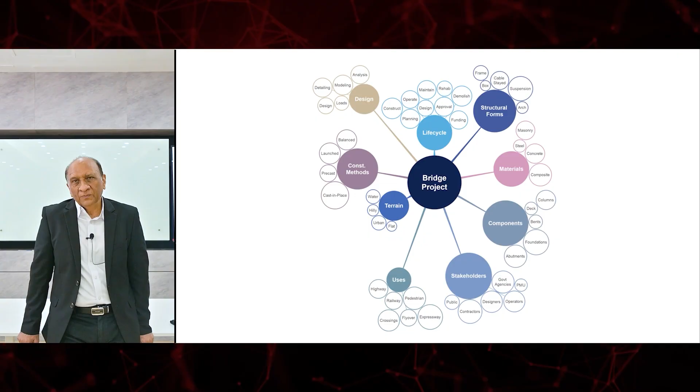If you expand each of those items, you will see further details, and we can keep expanding it to infinity, because everything has so much detail there. For example, in materials we have composite, concrete, steel, masonry bridges. In lifecycle we have so many steps. In components we have so many components. For bridge types we have pedestrian bridge, river bridge, and so on. Everything, if you expand it, goes really deep, and all of them are interconnected somehow. So understanding the whole bridge project goes way more than finite element analysis, or way more than just learning to use CSiBridge or just learning to use one tool.

This is a huge undertaking. As we get involved in this project of this endeavor, we will see that there's a lot more to do than just being engineers. We have to be designers and even artists, as I will discuss.

So that's the overall bridge project. Very quick view of how big this scope or the spectrum is. And emerging technologies are now coming to cover all of this. New technologies that we see are coming and affecting every aspect of this bridge.

Especially at CSI Bangkok, our role is to bring these emerging technologies into the bridge design process. So that's what we are doing, our research and development. Everything that we are doing is about bringing those in, and we are revisiting the programs to make sure that we incorporate these emerging technologies to make our work better, both in terms of how we work and the end product.

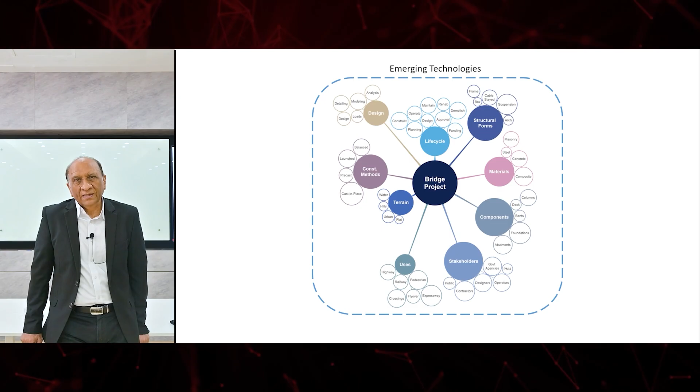So if you look at the bridge life cycle and the phases, it's a long one. It starts from feasibility studies, site investigation, and so on, all the way to rehabilitation and then decommissioning or deconstruction of the bridges. So it has so many steps on the way. We don't have time to go into every step, but we should recognize that we are dealing with a long process spread over 100 years or more of a bridge life.

So we have to be careful. Any decision that we make today will affect the bridge in 100 years or 75 years. Many times we think about very short-term decisions on cost and sizing, but it affects the bridge performance over a very long time.

And so that's why it's important that we understand where our position is. So we are doing the final design and detailed engineering. In this, we are learning about that. Of course, you are also involved in the construction, bidding, and many aspects, but typically consultants are only doing that part. But there are a lot of other things that we should also be focusing on.

And the CSiBridge Express and other programs that we are developing are going to expand this from only the detailed design to other aspects like cost estimating, budgeting, preliminary sizing, and I will talk about that a little bit. So we are trying to make sure that bridge engineers have more control or more role or more active participation in the bridge life cycle, not just the design part.

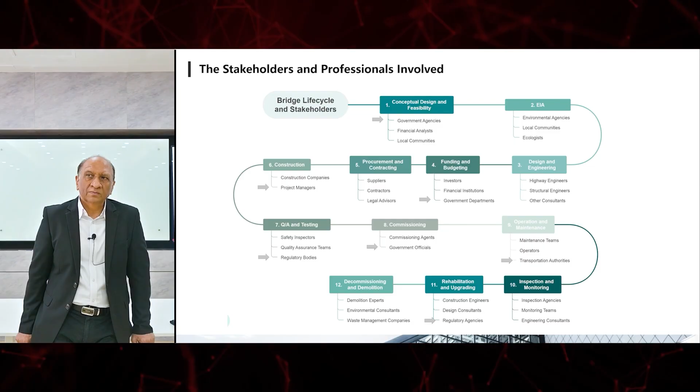So we have to work with the geotechnical consult, government agencies, and regulatory bodies, and project managers, and so on. So we have to deal with a lot of them while we are doing this project, during design and also during its rehabilitation. So bridge design, as I was saying, is a science, is an engineering process, and also an art.

Because now you will see, if you go to internet or to Pinterest, if you use that platform and say bridges, you will see all kind of, they only show beautiful bridges, because now somehow beauty and art is also part of the bridges. Bridges in Dubai, bridges in other places, they're just masterpieces in art, and in engineering and science at the same time. So we should start thinking beyond the design process.

Okay, coming back to Bangkok. So Bangkok, as I was saying, that is sort of get this inspiration to make this presentation.

If you look at Bangkok, people call it City of Angels, but for me, it's a city of bridges, because there are so many bridges in Bangkok that you don't see in many cities, and there's a reason behind that.

If you go to more developed countries, Singapore, Europe, or America, they prefer to make all their transport systems underground, because they are concerned about spoiling the city's landscape. So it's not permitted. Like in Paris, it is unthinkable that somebody can make a flyover or an overhead expressway. It's just not thinkable. Similarly, in other countries.

But in Bangkok, we see a lot of these structures above ground, because we have the soil problem, the tunneling problem, other issues, and also the cost. So a lot of our transportation system, mass transit as well as expressways, are almost all above ground. Another city which has it is Los Angeles. They also have most of the things above ground.

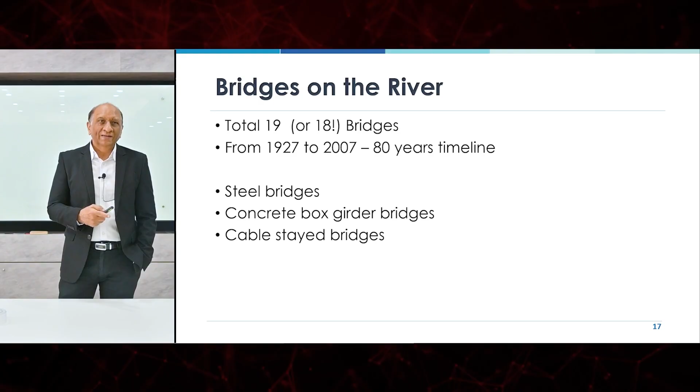So over 80 years, these bridges have been made, so we can see the development of bridge engineering if we just follow these bridges. We have steel bridges, concrete box bridges, and a lot of cable-stayed bridges. If you look at the bridges in terms of time, the first one was in 1927, the Rama 6 bridge.

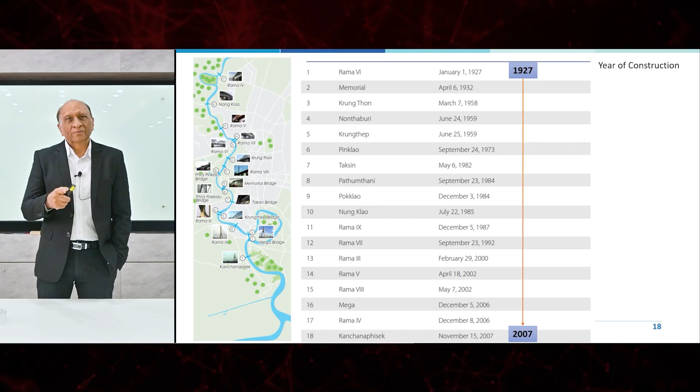The Rama 6 bridge was a steel truss bridge made for the train. It's no longer there, I understand—it has been replaced by a new expressway. I went there a few days ago and couldn't find it. Then we have other bridges, most of them steel in the beginning, then concrete, then cable-stayed, and so on. So you can see where they are located on this map.

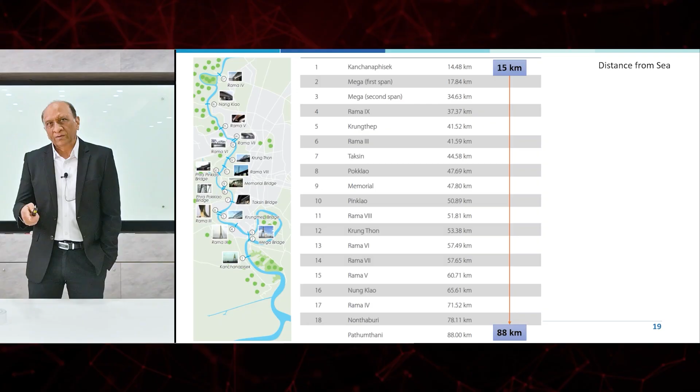Then we have the distance from the sea. So the first bridge is about 15 kilometers, all the way to 88 kilometers along the river, passing through Bangkok as well as its neighboring provinces like Pathum Thani and Nonthaburi and so on.

And then the span of the bridges varies—the main span from 485 meters, actually another one, not the new one, is longer than this, but up to 485 meters, which is quite large, down to 192 meters. So as the river goes northward it becomes narrower, and as it goes south it becomes wider. You can see the bridge width also changing to accommodate that river flow. So we have a very good range to study the suitable bridge span.

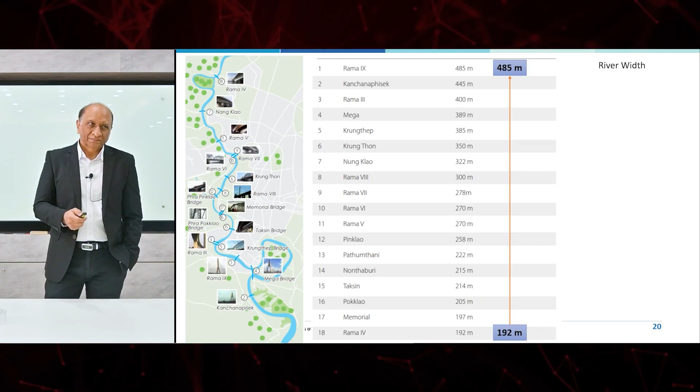Let's start with the steel bridges on the river first. This is the Krung Thep Bridge, a beautiful bridge. In the beginning, the problem was navigation, so they made several bridges which were openable, meaning the center span of the bridge could be lifted or opened for ships to pass. This is one of those bridges where the center span lifts up to open, so you can see over there.

The Memorial Bridge has the same thing. That portion in the middle, these two cantilever trusses, can be lifted to open the bridge for ships to pass. This was done at that time because high bridges were not practical, so they had these steel bridges. Most of these, two or three of them, had this opening or lift-up spans.

Then you have the Krung Thon Bridge, a very nice truss system. This one doesn't have a lift-up span, but it's a steel arch bridge, very nice. So you have different types of arch bridges here.

Then you have the Rama 6 Bridge, which was the first one, built for the train. It's a very simple, straightforward bridge, more on the north side. You can see here a very high truss with a large depth-to-span ratio because of the large loading from the train. That's the bridge that was built, probably the first one to be built.

Then we move on to the concrete box girder bridges. This is when they started to build the first box girder bridges. In fact, most of the bridges in Thailand have held kind of a record during their time when they started. One bridge at that time, Rama 3, was one of the longest cantilever box girder bridges at that time. Similarly, the Rama 9 Bridge was also one of the longest single-plane cable bridges at that time. So there are many kinds of world records, if not complete, temporary records when they started.

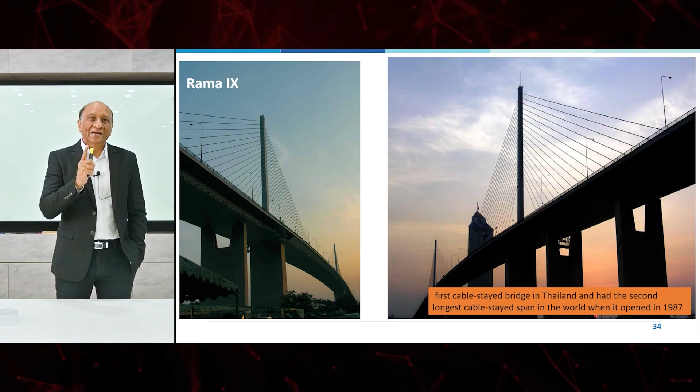So it's a huge challenge, and the pile cap for this one was so large. This is one of the interesting bridges, a single plane, one of the longest span single plane bridges at that time, because it doesn't have two planes, so it has a lot of torsion, as you can imagine, in the deck. It was made of a steel box with triangulation in the box.

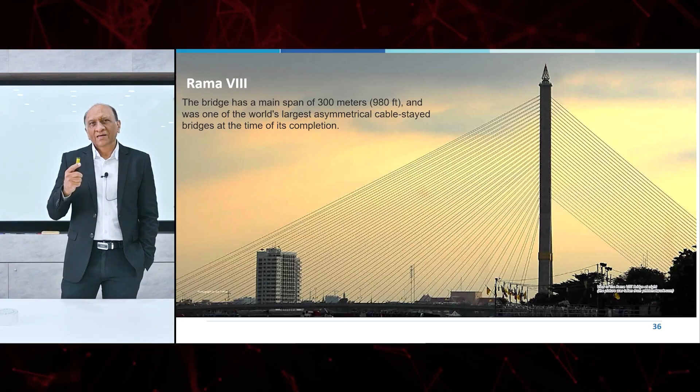This is the Rama 8 bridge, beautiful bridge. The beauty of this bridge is that it's in the city and very low, so you can actually walk on it, unlike other bridges. There are nice walkways and you can go and experience the bridge on top and on the bottom. It is single plane on one side and two cable planes on the other side. It's a beautiful bridge.

Most of the marathons in Bangkok always run through Rama 8. I've joined a few, and it's really nice — normally when I'm running on the bridge, I'm hardly running, I'm just focusing on the bridge itself to see how beautiful it is, because when you run from one side to the other, you see two cables changing into one plane. I think it's a beautiful bridge from every angle, because it's a single pylon bridge with two spans — a main span on one side and the other one is just an anchor.

Recently, just finished a couple of months ago, is the new bridge, which is just next to the Rama 9 bridge that was constructed earlier, because the traffic became so large that Rama 9 just couldn't handle it.

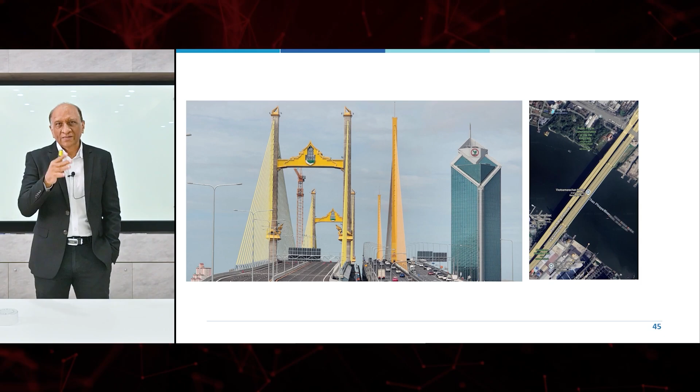The Rama 9 has had problems since its construction because of the large cantilevers around the central cable plane. There has always been some problem with the surfacing not attaching to the concrete, and the concrete not attaching to the steel box, and so on. So there's been always something going on with that bridge, and I think that's why they made the new one in different concrete, all concrete.

Okay, let's move on to the expressways. There are so many expressways in Bangkok. I arrived in Bangkok for the first time, I think, in 1986, and at that time there weren't any. So if you wanted to go from AIT to Bangkok, or anywhere, you just had to wait - sometimes it took 5 to 7 hours just to cross the city. But now we have so many expressways constructed during that time.

So this is the expressway map of Thailand, and these are the lists of the expressways with the operator - I took it from the BEM website - and then the distance of each one. There are about 275 kilometers of expressways in the city, as of 2003.

So that's quite a lot of bridges - they are all elevated bridges. You can see 270 kilometers of bridges, just bridges, all kinds of bridges, not counting the flyovers in the city. So that's a lot of bridges to be designed, constructed, maintained, and monitored.

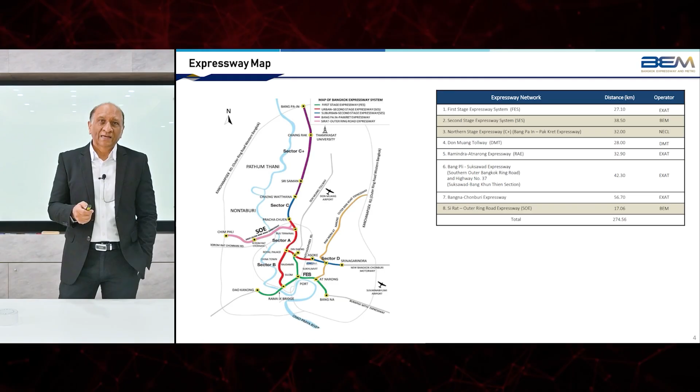The box girder is very big, a 6-lane box girder, but it's very empty, just a truss inside. The columns, the bents or piles, the piers are highly optimized, very, very efficient, because whatever saving they made multiplies 55,000 times. So they really optimized the design of this bridge in every way, down to the last rebar - the concept, design, system, and everything. It's really very impressive to have such a light bridge supporting 6 lanes of highway on top. Very, very interesting bridge in my opinion.

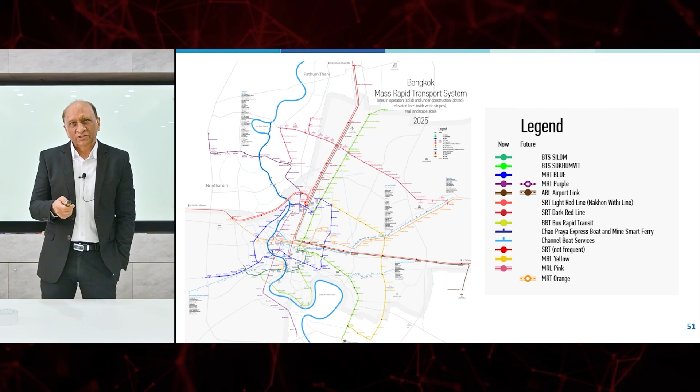They are constructed in all kinds of bridges, and there are so many stories during construction. This is the first SkyTrain project, finished around 1999. It's a segmental construction, each span has about 16 segments, and they were manufactured somewhere near AIT.

I remember we used to see 16 trucks carrying one segment each going to Bangkok every day, and every night they would assemble one span of the elevated highway. They only had 5 or 6 hours to do it because traffic could only be stopped at night, so within 4 or 5 hours they would construct one span, bring the segments, put them up, post-tension them, and finish before morning.

It was amazing because they built this in the middle of the busiest roads in Bangkok, like Sukhumvit. We watched this being constructed, and it was quite interesting to see it done while traffic kept running.

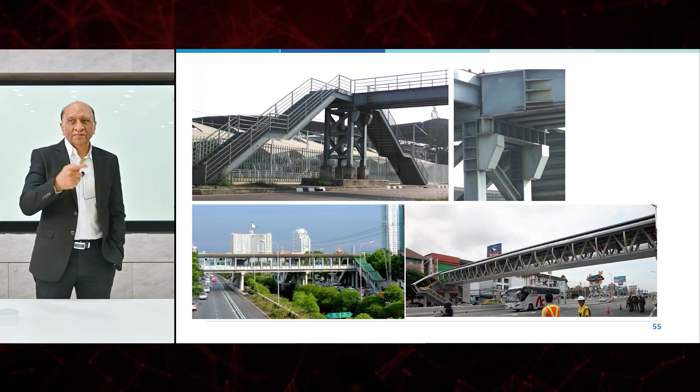This is an interesting one on Sathon. If you haven't seen it, please go there and walk underneath, it's a very beautiful bridge. A lot of people go and take the one at the bottom, the yellow one, along with some other pedestrian bridges. So you can see there's a lot of opportunity for creative expression in pedestrian bridges.

Now that we've gone through Bangkok's bridges as a summary, let's look at the challenges engineers have faced and the solutions they found, showing the complexity in designing these bridges in an urban environment and their construction. I think it's just unbelievable how this is done.

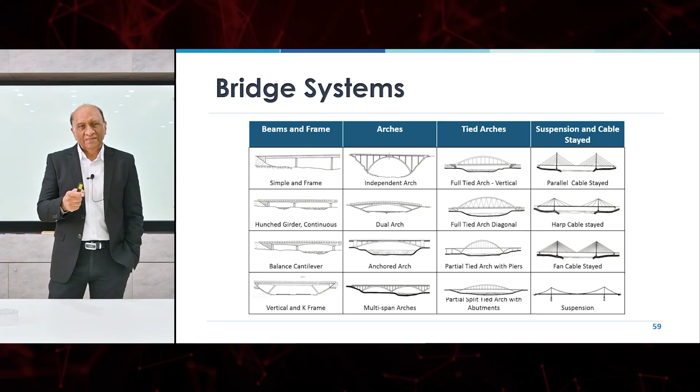Okay, the bridge system. I'm just going to scan through quickly. We have beam and frame type bridges, arch type bridges, tied arch type bridges, and then suspension and cable-stayed bridges. I don't need to go into a lot of detail here, I just want to give you some idea, and we'll look at them from the Bangkok bridges side.

The bridge also has a lot of components. We have a deck with slab, girders, diaphragms, and so on. We have substructure with transoms, approach, cables, piers, pylons, and so on. So there are a lot of components in the bridge that we have to model, analyze, design, and construct. And there are many ancillary components like barriers, drainage, lighting, and so on.

The biggest question in bridge engineering, and any structural system, is how do you choose which system is the best? Because you have so many options for the structural forms of the components. Which system should we choose? What should be the preliminary sizing? What will be more efficient? What will be more economical? Which will be built faster?

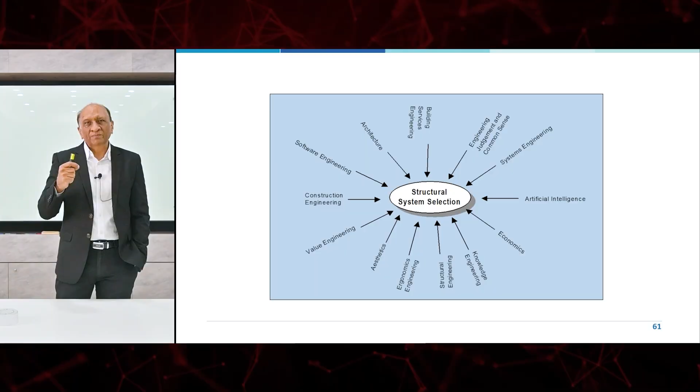Many of these bridges are build-operate-transfer projects. That means somebody puts the money in and then transfers it to the government, so they try to save every baht or satang they can from the design. It has to be really efficient, so system selection has to be done efficiently, and that depends on so many factors.

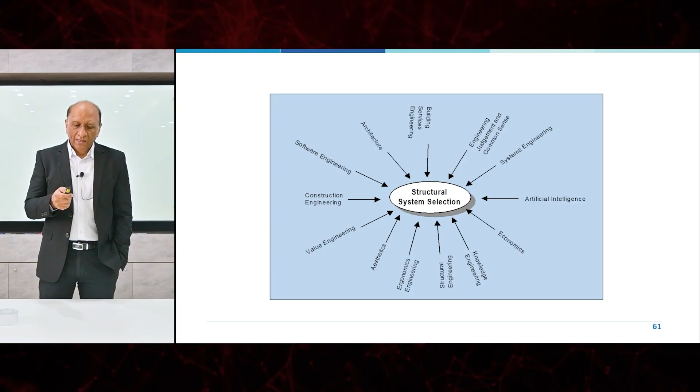But of course, as you know now, AI is here, and AI can definitely help us in this part. I will present towards the end one of the tools that our team and students at AIT have developed, which I think you have seen before, but I will show that anyway.

So we have explicit learning from experience, the first one, which is what we're doing now. By looking at bridges data or bridges we have already seen, we can learn from that and select the next system. That's learning from the experience of others. The second one is an AI system based on synthetic data. That means we can generate valid data that can be used, together with real data, to make decisions for the design or system selection for these bridges.

So let's go back a little bit and look at the bridges again in the Bangkok context, and we'll come back to this one more time.

If you look at the truss forms I showed you already, we have several truss forms. Most of them have a pass-through design, meaning two trusses on each side connected together at the top. It's a pass-through truss system, which is very efficient because it prevents the buckling of the trusses in compression. The top flange is connected continuously, so you don't have a buckling problem. Otherwise, if you put the trusses independently without connecting them, the truss can buckle in compression and won't be stable. That's why this system is very efficient and has been used in all of the bridges.

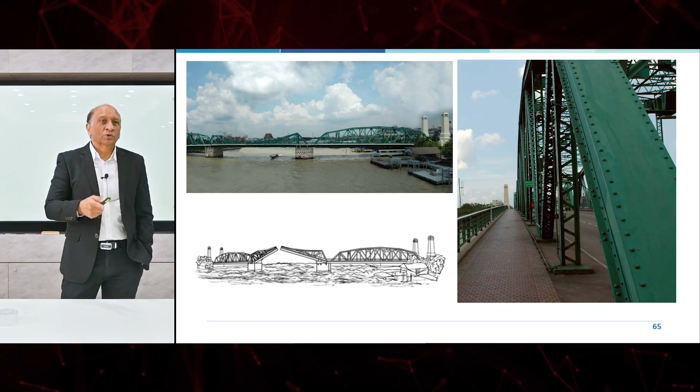That's a sketch I did just to show how that bridge would have opened during the opening, for when the traffic was passing over there. You can see that the cantilever truss has a different design than the main span behind it, and the two cantilevers meet together.

It's very interesting because the next bridge is also a balanced cantilever, concrete box girder. It's just that it doesn't open, but the concept is the same: two cantilevers coming from the sides and meeting in the middle, exactly the same concept as this one. So, like I said, the people who designed that bridge looked at the bridge and then looked at the design from that angle to make sure there is some relationship between them.

This is just the connections. You can see here how the members are connected to each other, and then you can see also the suspended span concept, that you have half the spans coming from this one, and then you have a suspended span in the middle, which was used for Rama 6 bridge.

Now let's look at some deck systems. These are the deck systems used in the bridges that you have seen so far. There are several box girders, and because these are all bridges on the river, they're long span, so you cannot use I-girder or something. There has to be a truss, or a box girder, or a cable stay.

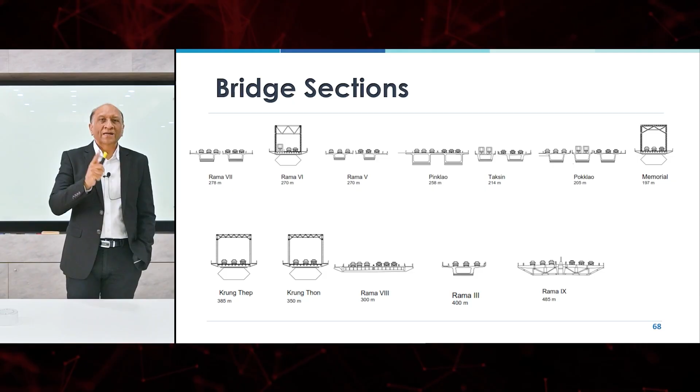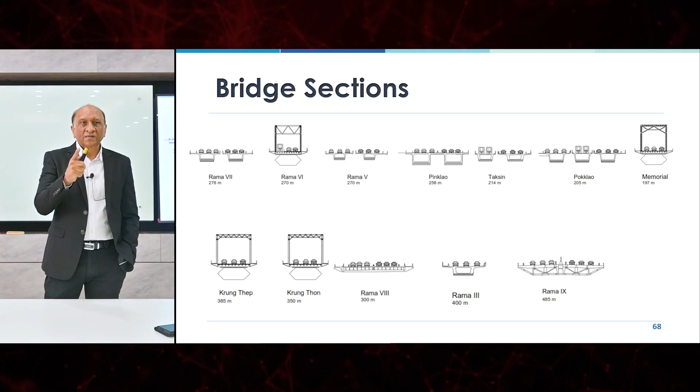At the cable stay bridge section, you can see there's a steel truss deck for Rama 9, and there's a steel beam for Rama 8 with the box underneath to cover it. For other bridges, there's the steel pass-through truss, so there's nothing below that. The deck is here, and the truss is above that. For concrete bridges, the structure is below the deck, but for steel, the structure is on the side or above the deck. That's the key difference you can see from here.

They really made it very, very fast because they just put the steel column. So the column is steel, the bracket is steel, the crossbeam, the transom is steel, girders are steel, and then just the diaphragm is steel, and the slab is concrete. There are many of them.

The problem that we are facing with these bridges, as you might know, is the vibration. Many of these bridges have a vibration problem which is being observed. There was a recent study by one of our colleagues from AIT. They did all of the instrumentation and found that the vibration in many of them, so they are being retrofitted at the moment. If you go on, especially on Rama 9 Road, you will see that the flyovers are being retrofitted to reduce the vibration.

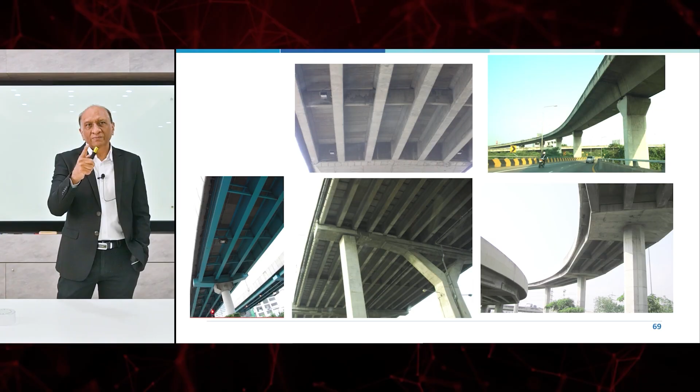Also, they require a lot of maintenance, repainting, and so on. Concrete, on the other hand, doesn't require a lot of maintenance except at the bearings. But you can see that the concrete, almost parallel, you have the diaphragms, and you have the concrete girder, and then you have the main transom. So you can see, on the right-hand side, on the top, the box girder, the same arrangement, and it's much more clean. A box girder is just 2 webs normally, or 3, and then you have a nice clean surface, and everything is inside - you don't see anything. Diaphragms are inside, if there are any.

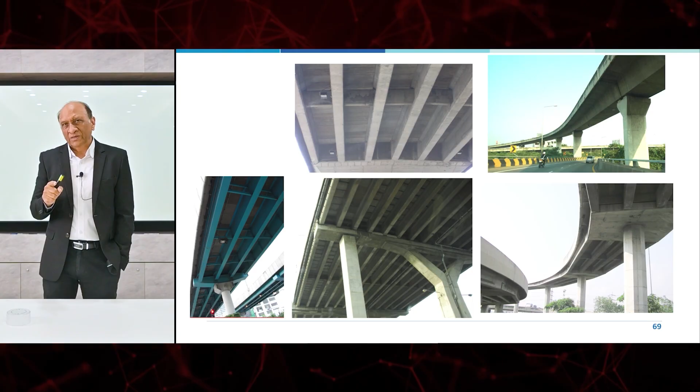And it's very good for curved bridges. But what I want to show you is the right-hand top and bottom picture. The top one is a curved bridge in box girder which just flows through quickly. For a similar curved bridge at the bottom using I-girders, you have to do, as you can see here, that you can't curve the beams. So beams are straight, meaning the slab has a variable cantilever from the sides on that one, and at some location, the slab may come inside the girder.

In fact, when we were developing the CSiBridge Express and we curve the bridge, we find there's this problem that the straight girder goes outside the deck and we have to adjust the deck width.

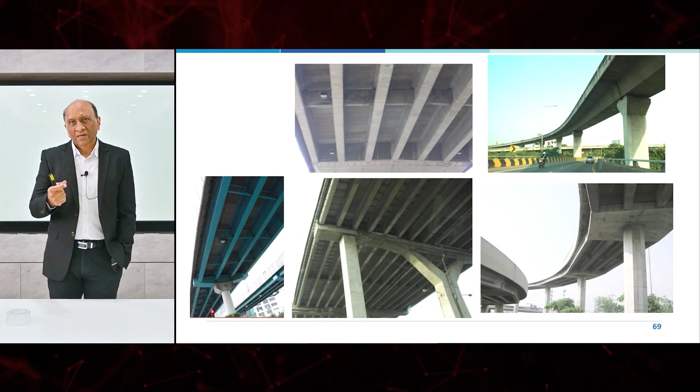Also, second thing you will notice is the capping head on the column. For the box girder, there's not a problem, but on the right hand, the one on the right hand bottom, they tried to keep the girder length the same, so they changed the size of the capping slab or the pier head, and made it unequal on both sides. So there's a very nice trick to keep the girders the same size and design rather than changing the length of each girder, which would be the second option. So this is some of the interesting things that we can observe from these bridges.

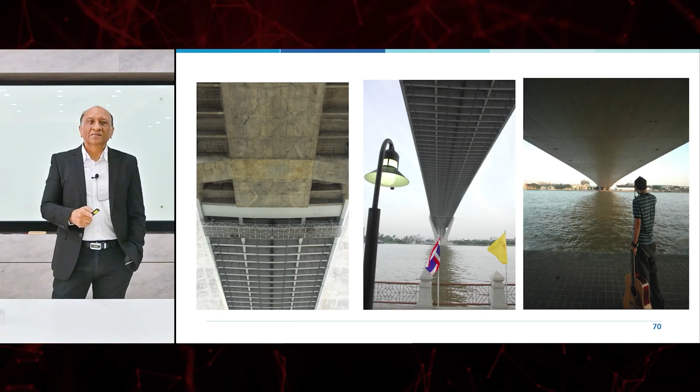This is an interesting thing for the cable-stayed bridge, where you can see the approach slab is in concrete, and after the main span starts, it becomes steel. That is understandable, because for the main span you want to reduce the weight as much as possible, since cables are so expensive, you don't want a heavy weight. So as soon as the main span starts, the expansion joints between the approach slab and the cable-stayed bridge are designed to handle very large axial expansion due to temperature. It could be as big as 300 millimeter or 200 millimeter. During summer and winter, day and night, the main bridge will expand and contract, and all of that expansion and contraction has to be accommodated close to this joint that you see over there.

On the right-hand side is the Rama 8 bridge, which is very smooth. They covered it up, and inside there are I-girders, but they covered it up with the smooth soffit, because it's in the city and it's very low, and you can actually stand there watching that. So that's the other bridge that you can see. Cable-stayed bridges have this interesting design for their decks.

Now let's look at the pylons, piers, and pier frames. This is where you will see things get really, really complicated in bridges. In my personal view, designing the deck is one thing, and designing the substructure is totally another challenge. Because the deck you can standardize to some extent, spans can be similar, and there's not much you can do. But for the substructure, every substructure may become unique, especially in the city, and then you will see here.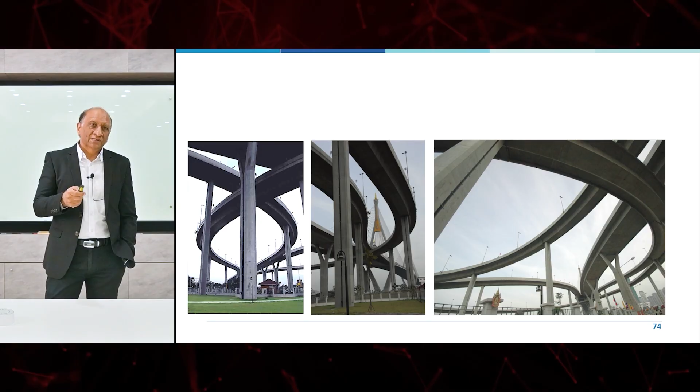So to avoid that, you need to make it as less stiff as possible, so it won't attract many moments. It will just act like a prop. The bridge stability is coming from its curvature, so you don't need the stability of the column to hold it. The bridge is stable as a form, but it's just propped up. So a few columns are designed heavy to take out all of the forces. It's a very complex arrangement of the substructure, with very careful designing of which column is the anchor column, which is the prop column, which column we should allow movement on, and which we should not. So modeling a bridge system like this is a huge challenge.

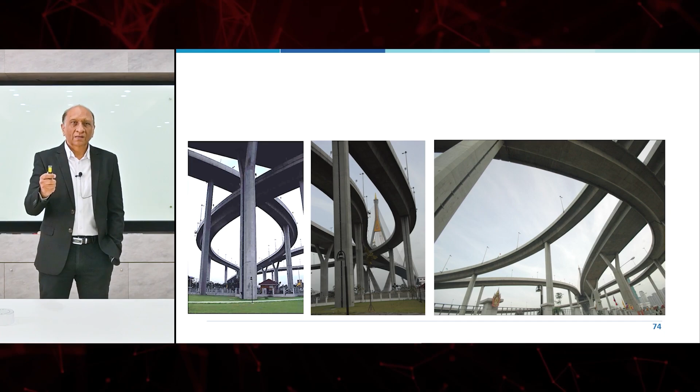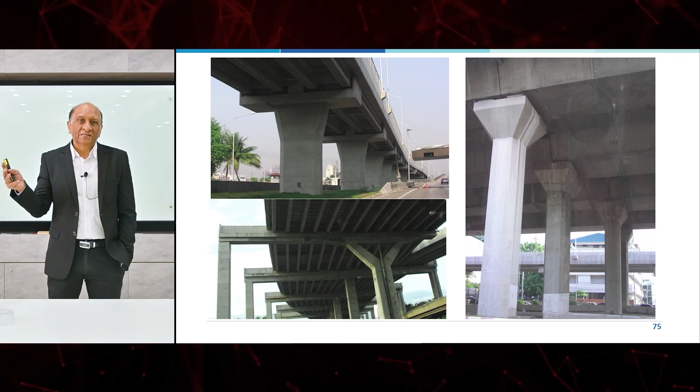So every column is different: you see a Y column here, the next one is not a Y column, before that is a single Y column. Every bend, every pier may have to be designed uniquely, and the substructure has to be modeled and analyzed. Mostly they are post-tensioned, so bridge engineers will spend most of their time designing the substructure for bridges of this kind. Box girder, on the other hand, is simpler. On the right-hand side you just have a single column supporting bearings at the top.

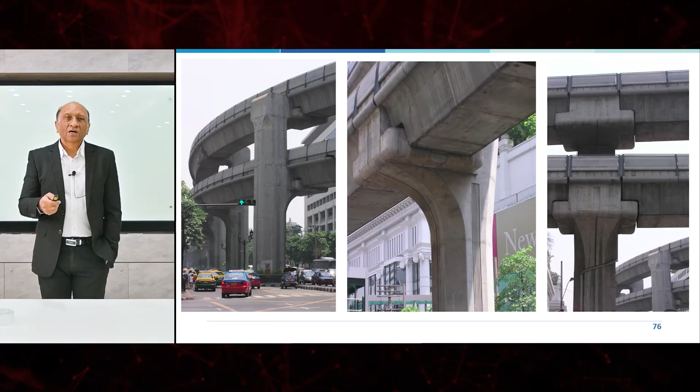You can see on the right-hand side how complex it can be. So the substructure of these systems — expressways as well as MRTs, the mass transit systems — can be very complicated and requires special attention to long-term creep effects for deflections, tilting of the cantilevers, and so on.

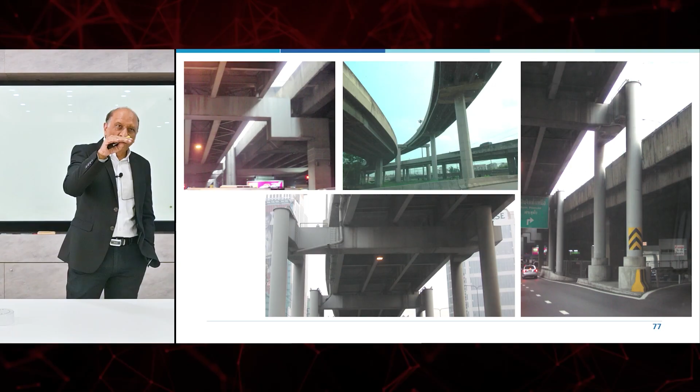Look at the left-hand side — you can see once again the steel stepped girder, stepped box girder. In the middle, you need to change the geometry of the girder because the elevations on the two sides are different. This is an off-ramp at Sukhumvit from the main expressway, and you can see what they have to do to make that work.

This pillar, the steel pillar, has to go under the existing bridge. On the other pictures on the right-hand side, they just don't have enough clearance, so they cut the bridge slightly to fit those steel columns in. The steel columns must have been optimized as much as possible so they don't have to cut the bridge too much and can still fit in the tight spot.

These are the challenges that bridge engineers face in handling bridges in a city. The same is the case with the central one — you can see a curved bridge with tall columns and their pier heads.

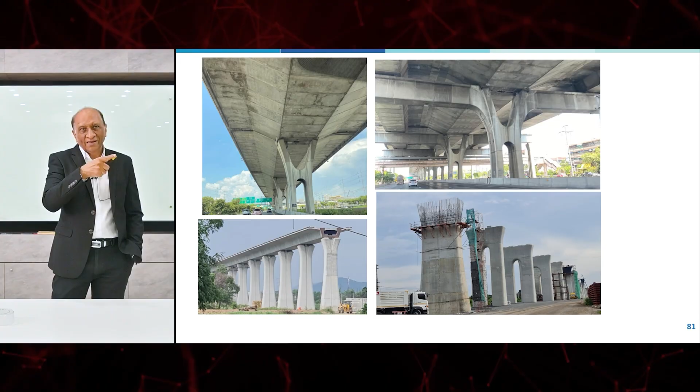The one I showed you, the long expressway, beautiful design of a 6-lane on a single cell box with triangles inside and struts inside, very efficient. And the one on the bottom is a very new bridge you might or might not have seen, for the high-speed train between Bangkok and the North. So those are the columns for that, the bottom two pictures.

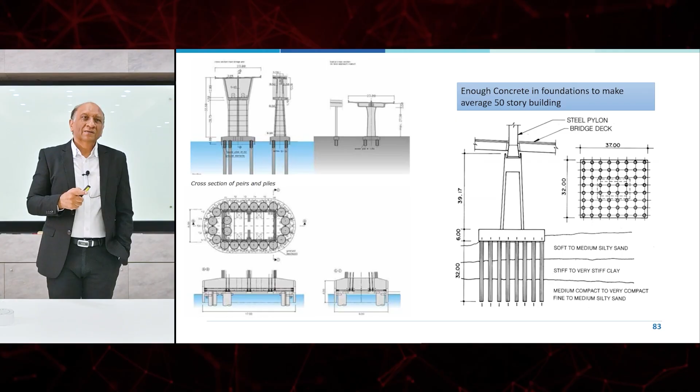I remember when they were constructing, they had to stop the whole supply of concrete to the city. All supply had to go to this foundation. So you can see here, huge foundations there.

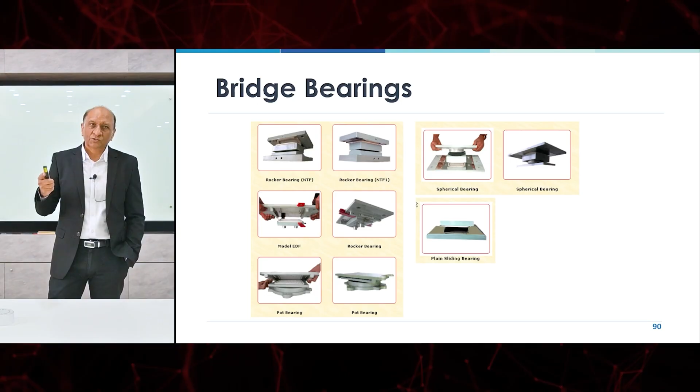And then we have bearings and joints. One of the key challenges in bridges compared to buildings is that in buildings, everything is made to connect together, nothing is supposed to move away. But in bridges, they are designed to move while transferring the load. That challenge of allowing things to move while transferring loads becomes a challenge in bearings of bridges and expansion joints, because you have to transfer the force but allow movement also. That makes a challenge in construction, but most importantly in modeling, where you have to model these bearings as linear or non-linear. Sometimes these are real hinges in old buildings, old bridges, steel, a true hinge.

You can see on the left-hand side the sliding, and then you have these bearings, all kinds of bearings, complicated bearings coming up, some high, some low. You can clearly see some pot bearings, and how the expansion joint has to be provided for their movement, and how they allow movement in one direction but not in another, and so on. So you can see all these interesting bearings in the bridges.

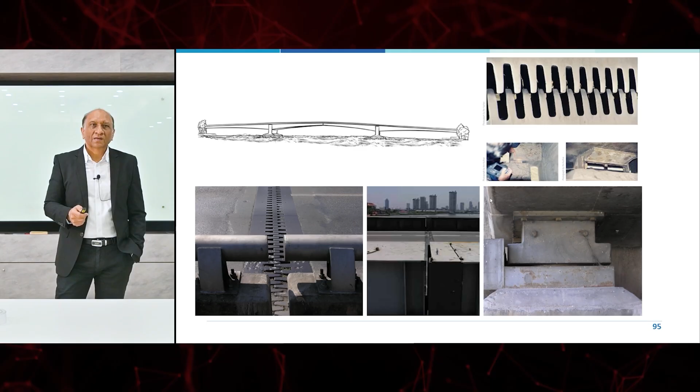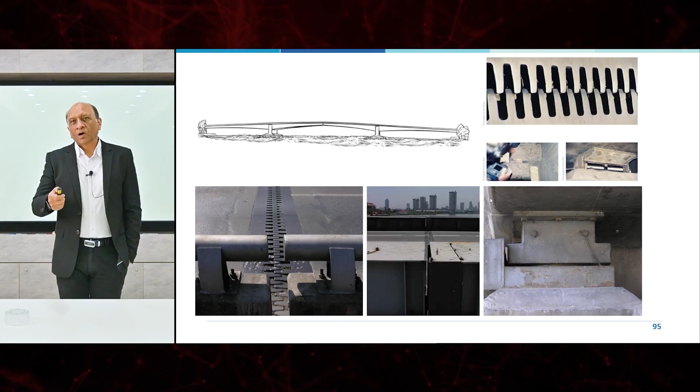Like I said, that's the expansion joint in the center of that bridge, Pinklao Bridge, and then that moves. Sometimes it gets locked, that comb you see in the middle is the expansion joint, moving, closing, sometimes completely closed, sometimes completely open, depending on the day of the year and time of day. And that's the lock I was telling you, there's a misalignment on the bearing, you can see that on the bottom right.

Let's talk about the aesthetics in bridges a little bit. This Rama 3 is a beautiful bridge, so the aesthetics have been considered very nicely in the design of everything in that bridge, I think that shows there. So we must make sure that when we design bridges, to form the flow, the aesthetics should be considered in all aspects.

So there are some rules, as you can see in this presentation later, how to proportion this. What we have seen so far is what we should do and also what we should not do, by looking at existing bridges, because you can observe the good things and also observe not so good things. So we can learn from this experience.

Okay, future design trend. Now, because of the tools coming in, we can integrate the whole process.

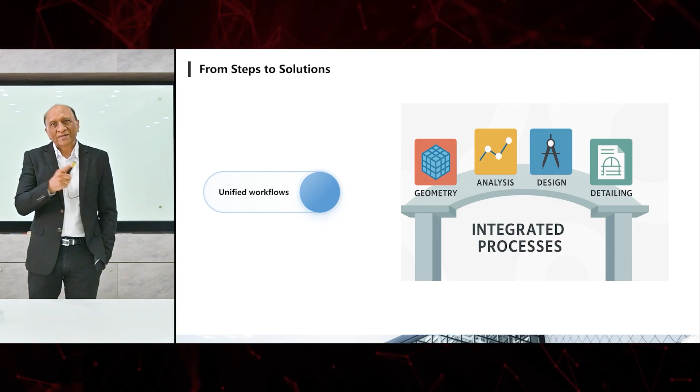Before, it was step by step: one step, transfer data, another step, transfer data, and so on. Now we have the opportunity to integrate. SAP90 was made 50 years ago when people started designing bridges using SAP90. At that time, it was a program that purely worked on text data files, no UI.

From there, we have SAP2000, which advanced a lot. And then from there, we have CSiBridge, which is a special version of SAP dealing with bridges. And now we have the new CSiBridge Express, gradually in that transition. So CSI is developing these tools more and more focused toward bridges, more integrated with every step.

CSiBridge main can handle any bridge of any type, of any complexity that you saw before. So there's nothing CSiBridge cannot do if we model properly.

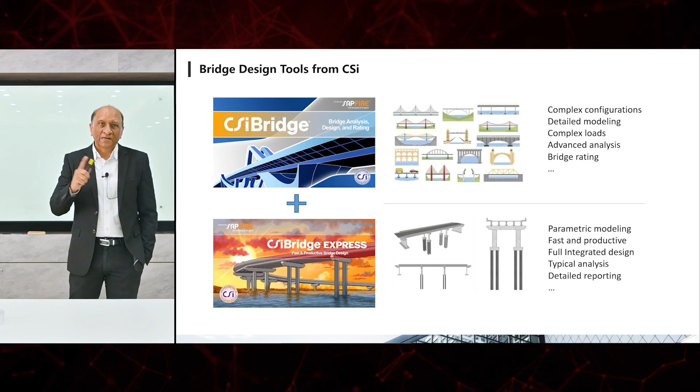CSiBridge Express, on the other hand, currently is focused on parametric design of girder bridges, plus box girder bridges in the coming version. So let's just take a quick look.

In the parametric design, you can start from the map, make the design, automatically make the mesh, automatically do the analysis, automatically do the design, automatically do all the rebar cage, automatically transfer to Revit, do the costing, BOQ, and finally put the bridge back on the map.

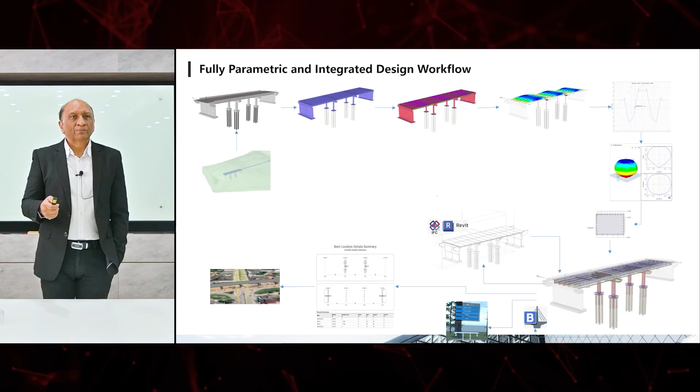And then you can have the BOQs and the costing done. The costing and BOQ are an integral part of the bridge because that is needed right from the beginning. So we can do that.

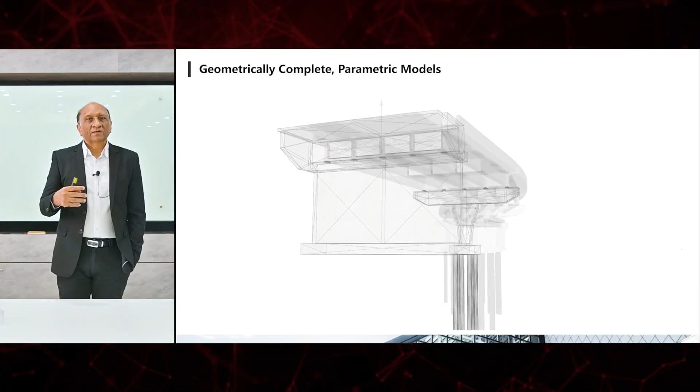Okay, let's take a quick look at the three-minute video showing how the parametric modeling can help us create the bridge completely, geometrically complete, step by step.

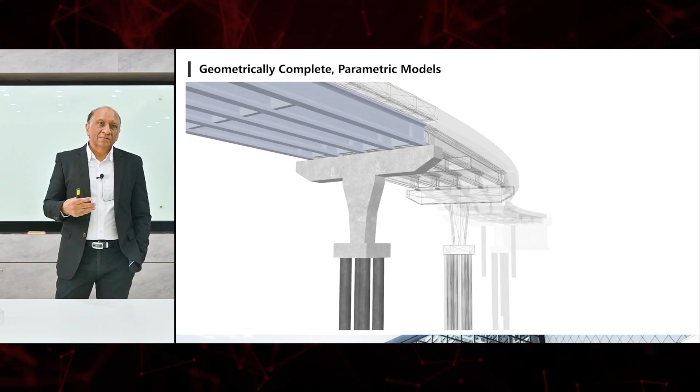You can see that the abutment is being modeled, and then you have the pylons and foundations and the girders and the barriers and the diaphragms. You keep on seeing how the bridge is built up from pure geometrical elements which are almost as accurate as the construction.

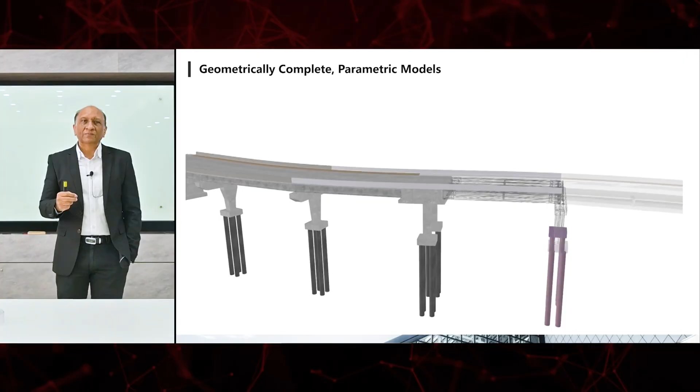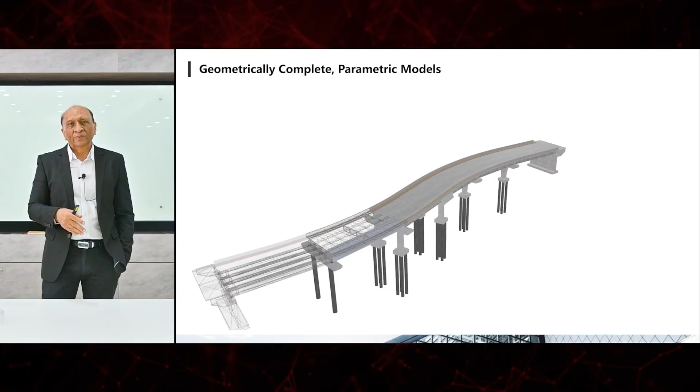It's important that if other people are going to use these tools, we make the bridge complete - not just a finite element model, but a physical bridge model should be as complete as possible so people can use it for drainage design, lighting design, management, or anything.

So the first task is to make sure that the bridge model is as complete as practically possible, ready for construction level of detail. That's the first thing. We start from that end to make sure the bridge will have sufficient detail.

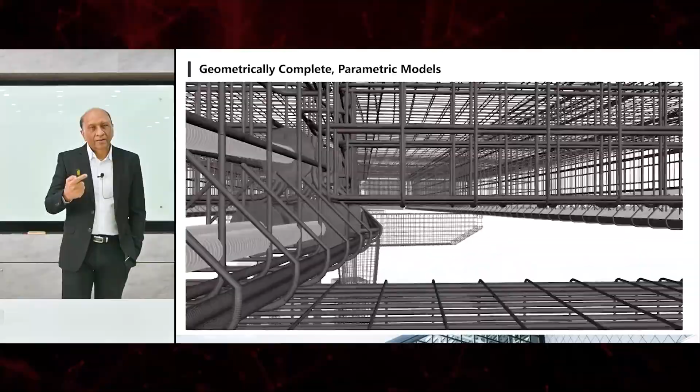You can see that now the reinforcement should be part of the bridge model, not designed later. You can update it, but we can put the reinforcement in the bridge at the time of modeling. So we already have the costing, we already have the BOQs ready. We also know how the bridge reinforcement cage will look like.

And we can modify that without even going through the design to see what we need. So you can see the bridge, the reinforcement is all there in the model itself before we do any analysis or design. This is the model of the bridge before we've done the finite element modeling, analysis, or design. So you can see it's more or less complete in every way.

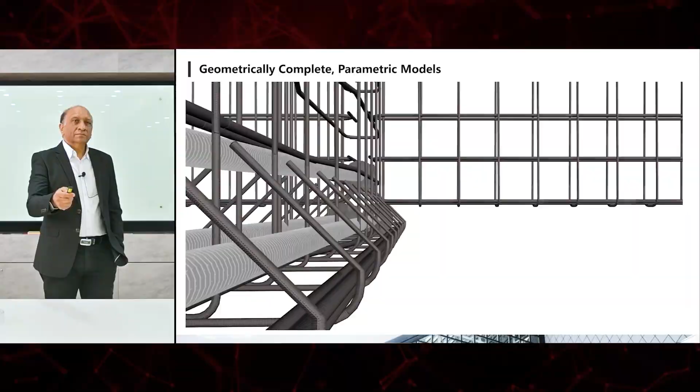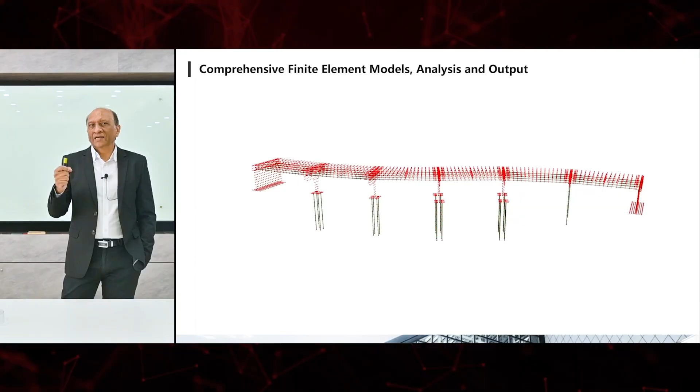And this is the modeling, second part now: how do we convert that into a finite element model which will be as good or even better than we can do manually? Normally people model these bridges using frame elements.

But in CSiBridge Express, we use the shell model and solid model to model everything, because that's more precise and matches more with the physical structure.

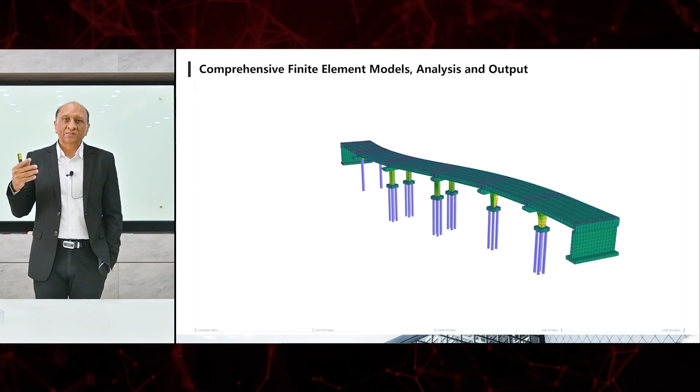So the physicality of the bridge is maintained by creating a finite element mesh which is very close to reality, including the abutments, all the components of the bridge, piles and so on, and soil and springs and everything.

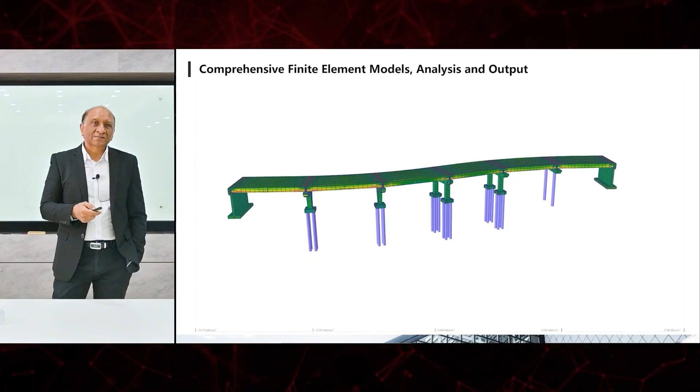And then you can analyze it. From that shell analysis, you can extract the forces, bending moment, shear forces for the design purpose by using integration. And then you can get the forces in the substructure.

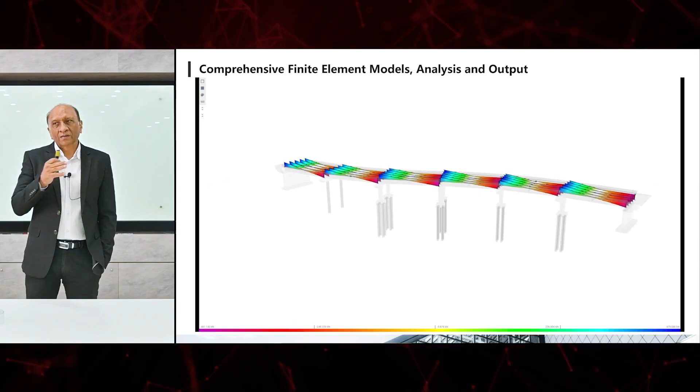And then you can use that information to design the foundation, design the columns, design the capping beams, and so on. So that's how the integration of the complete geometry to meshing to analysis will work.

So you can see here that all the things that I showed you earlier, then you can get the design forces from there, and the program should be able to design those substructure as well as not only the superstructure, but substructure components as well, all the way to piles.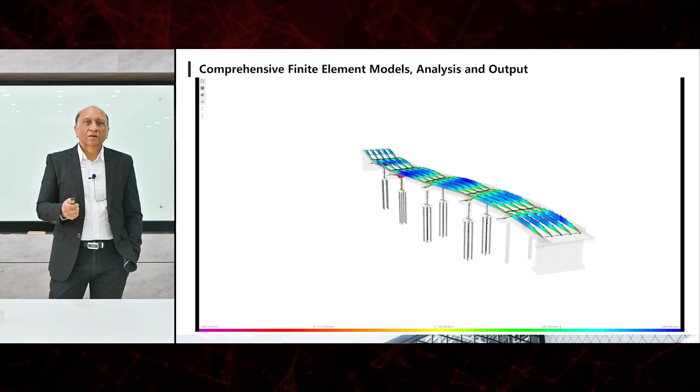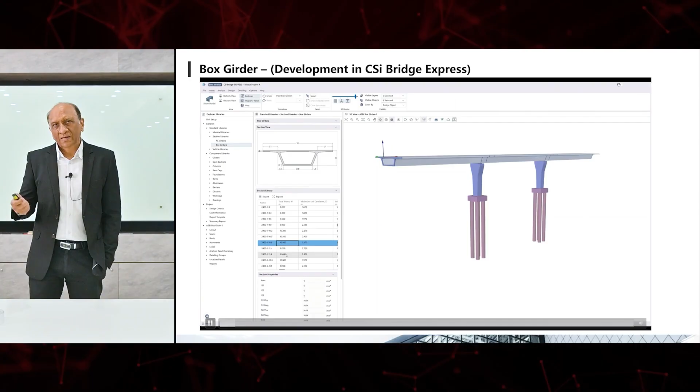Okay, so this is the last slide, the box girder coming up, not complete yet, but this is the next version of the CSi Bridge Express, which we hope to finish very soon. So currently, basically, handling the box girder in the same way. Box girder modeling is normally more complicated because of the shape of the box girder.

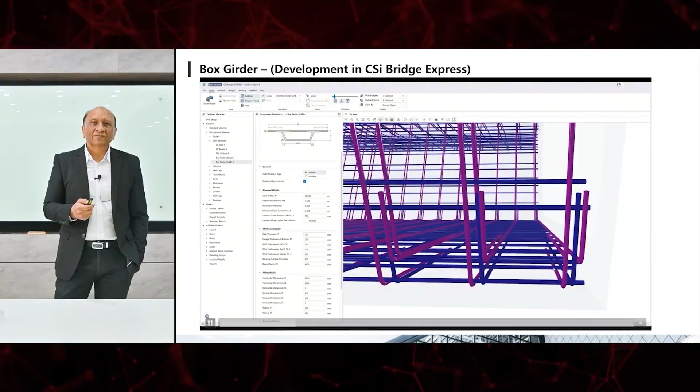So we can create automatic mesh, also put the reinforcement in the box. And this is the same box used for many of the bridges in Bangkok. So you can put the reinforcement, it's already there. And then from there, once you have defined the segments of the box and set the geometry of the box, then it can be put onto the bridge itself. So that's the bridge. And then you put the box there. Now it's a box girder bridge.

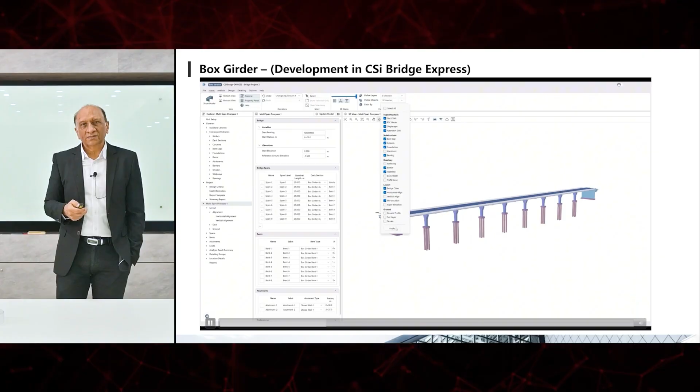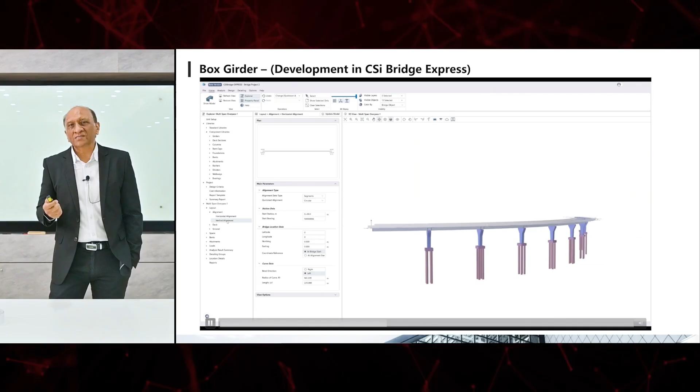And you can see inside the box if you walk through or crawl through the box. And then the good thing about parametric design is that you can create a straight bridge and then just put it on a curved alignment. And you say, okay, I want a curved bridge, and the bridge will become curved, and all the things will just become curved without doing any change, just one step, and the straight bridge will form the curve and also the elevation. So it's a curved bridge with super elevation, or then you can just make it in few minutes by designing it for the straight and then just putting it any alignment. And because of the parametric modeling, it just gets everything.

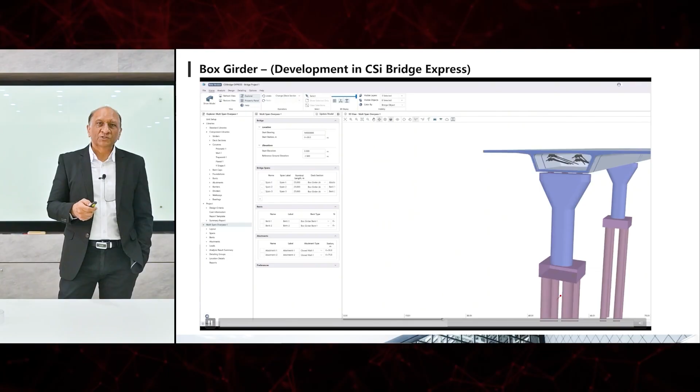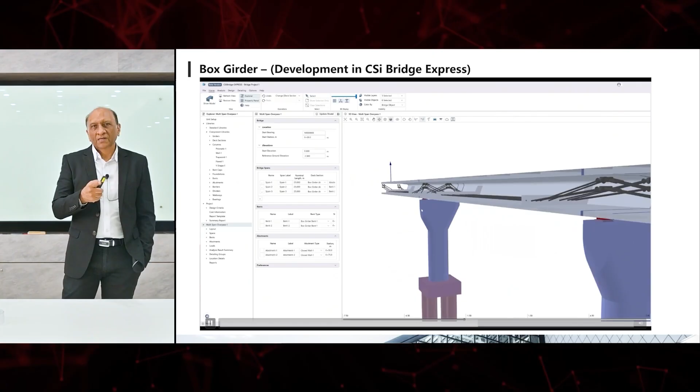And you have the tendons inside, the post-tensioning, you can see, and this is the external tendons for this bridge. And then you can see them, how they will be anchored, so all these components are real. And then the model will take these real components and then create the finite element mesh and do the analysis. And then, of course, like I said, the rebar cage is already complete because we defined it from this superstructure all the way to the piles. So everything is in the model, and it just has to be confirmed by analysis and design. So that's the way that the parametric designs will work.

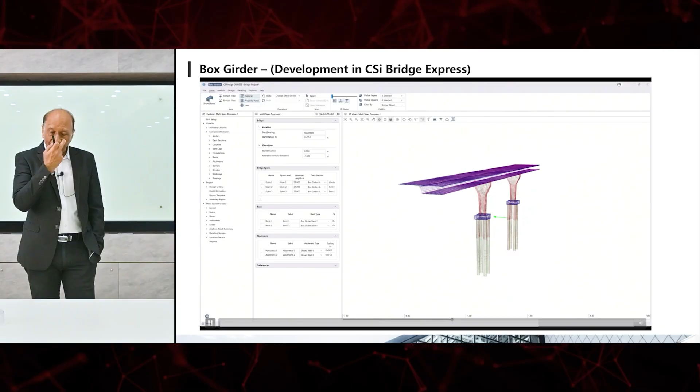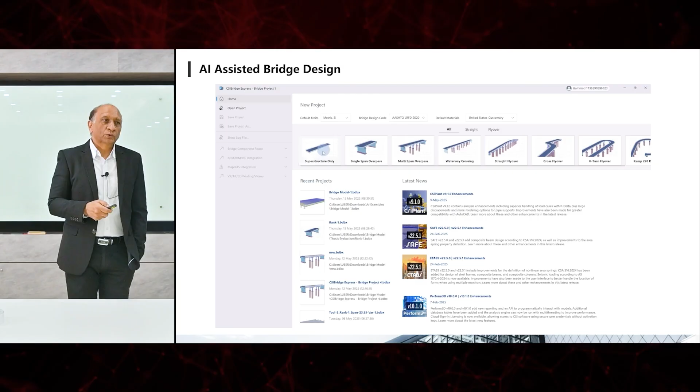The last item is the AI-assisted design. This is the way that AI can be used to carry out the preliminary design of the bridge, because a student here in AIT, who just finished last year, used CSi Bridge Express to design 7,000 bridges of every different configuration, then used the data from those 7,000 bridges to create an AI-enabled tool.

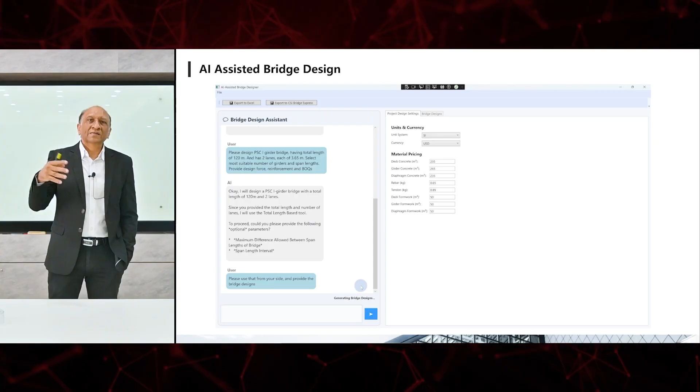So you can have a conversation and say, I want to design a bridge that much long. What is the most economical, optimum size of the girder, spacing, number, span, how many spans should I use, what kind of girder should I use? You can have that conversation with this AI tool, like a ChatGPT kind of thing, and it will give you many options that are possible.

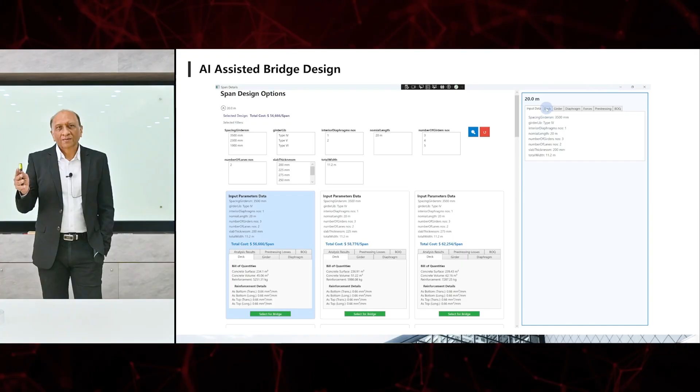Then you choose one of the options, and this option will be transferred to CSi Bridge Express for further analysis. So you don't have to start the model, you just use AI to do the preliminary sizing, you can modify here, and then it goes directly and creates a model in CSi Bridge Express ready to run. So theoretically speaking, a bridge could be done in 10-15 minutes for the preliminary design. Of course, for detailed design, there's so much more to be done, but at least we can have the AI tools assisting us in that direction.

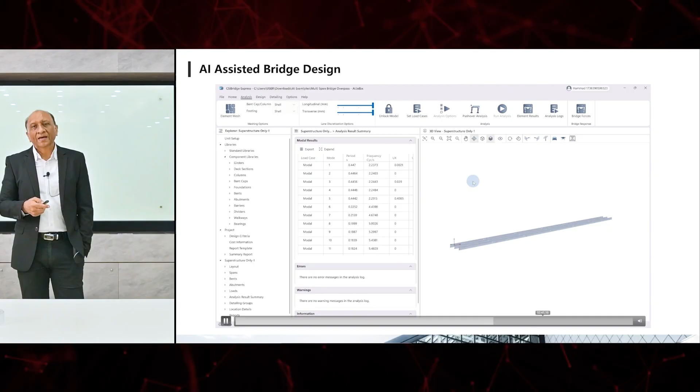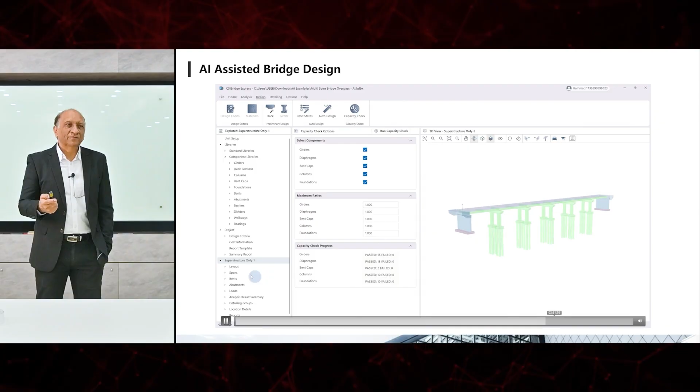So after that, it will be transferred to CSi Bridge Express, and then it will be analyzed, just to save time. So then all the reinforcement is there, all the design is there, everything is complete. So without entering any data, through a conversation with the AI tool behind the program, we can actually create a typical bridge model. Of course, this is not good for all the complex bridges I showed you, but it's good enough for starting a straight bridge, which can then be curved, which can then be modified in the program here.